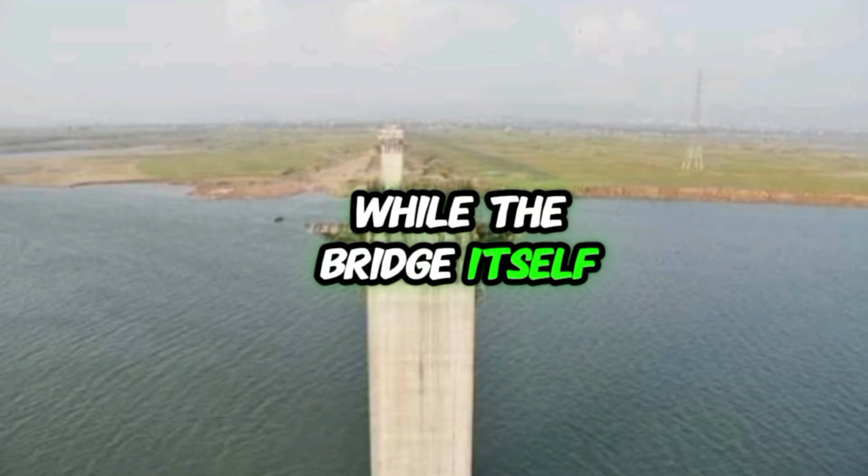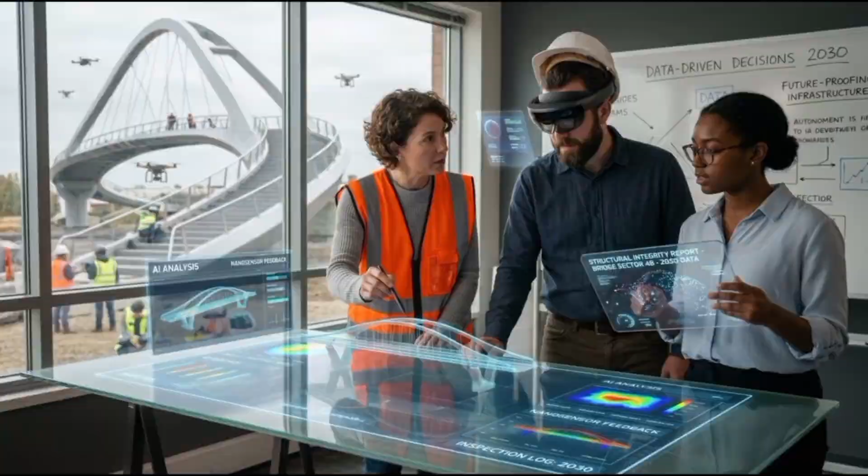The Golden Gate Bridge is one of the most photographed structures on Earth, a 2.7-kilometer line of steel that appears to float above San Francisco Bay. But imagine seeing another bridge that had already consumed years of work, with most of its structure standing, while the final connection remained missing and the construction site simply stopped.

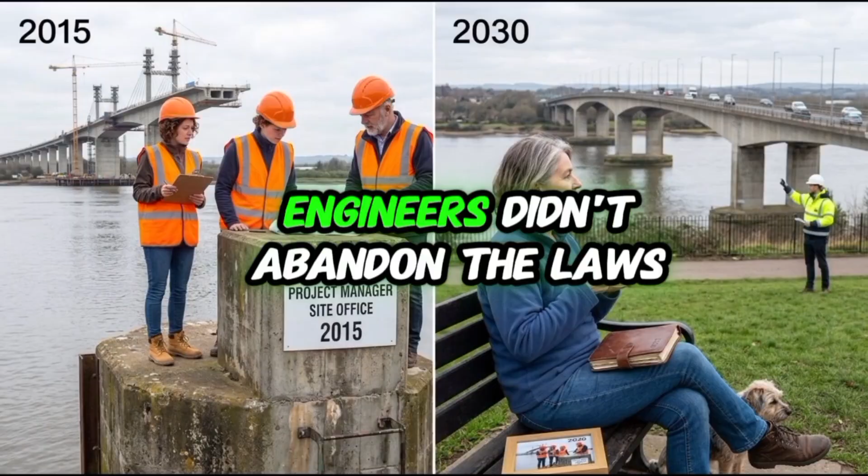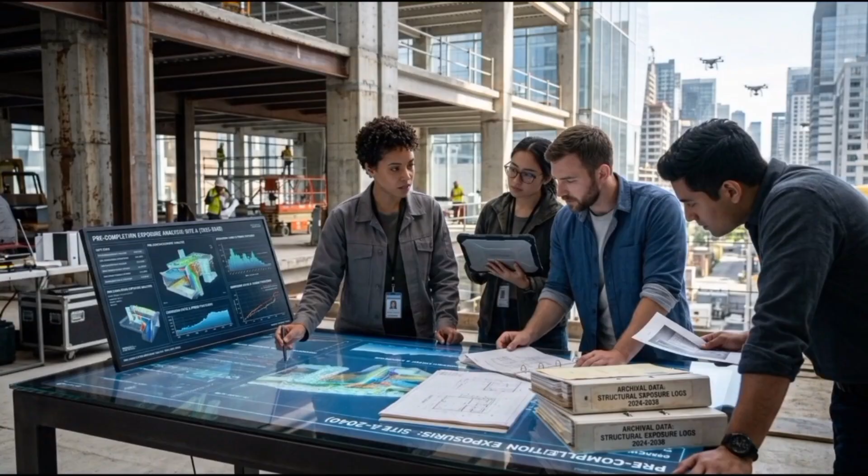Engineers didn't abandon the laws of physics. The project became trapped in contracts, funding, land access, and coordination problems. This is the Rathoa Haryam Bridge. And here's what nobody tells you about how a bridge can be almost finished, yet remain unfinished for years.

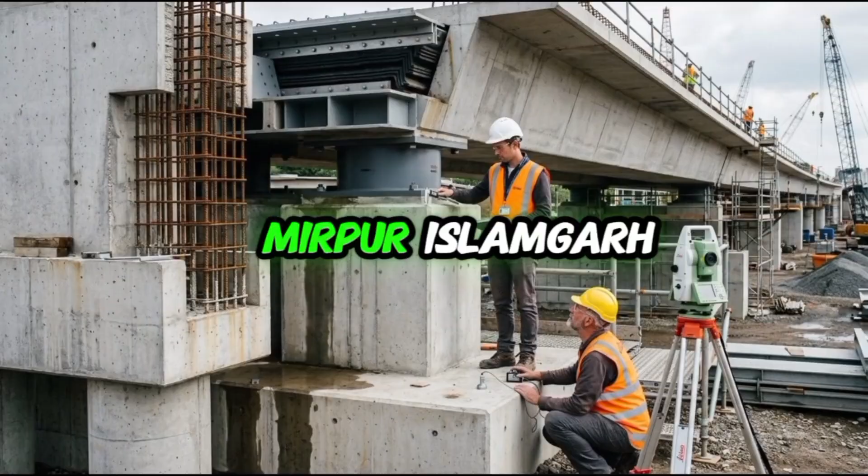The Rathoa Haryam Bridge was conceived as part of the infrastructure around Mangla Dam, with a straightforward public purpose: connect communities around the reservoir and dramatically reduce travel between Mirpur, Islamgarh, Chakswari, and surrounding areas. The project was initiated in 2011, and the approach roads were eventually completed, but the bridge itself became a different kind of engineering story. The client was the government, working through public sector infrastructure arrangements in Azad Jammu and Kashmir, while the project became tied to the wider Mangla Dam raising program.

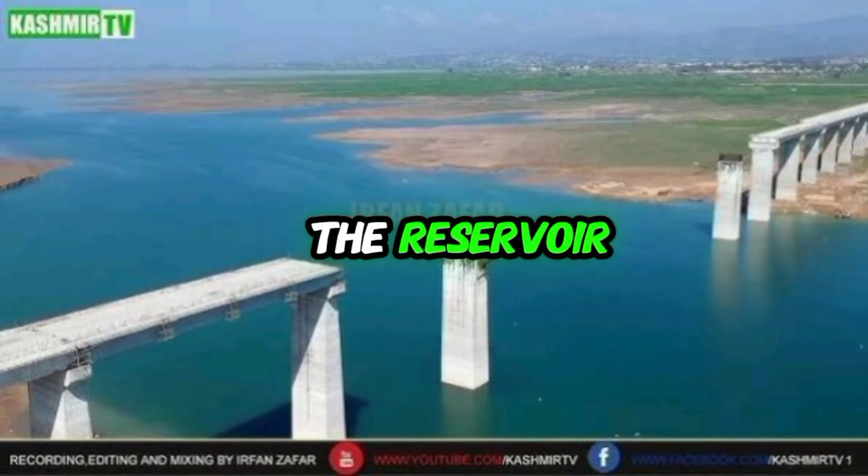The brief sounded simple enough: build a major crossing over the reservoir and connect the communities that had been separated by the expanded body of water. But the scale was not simple. The bridge is roughly 3 kilometers long. And according to officials, by the time construction stalled, about 80% of the work had already been completed.

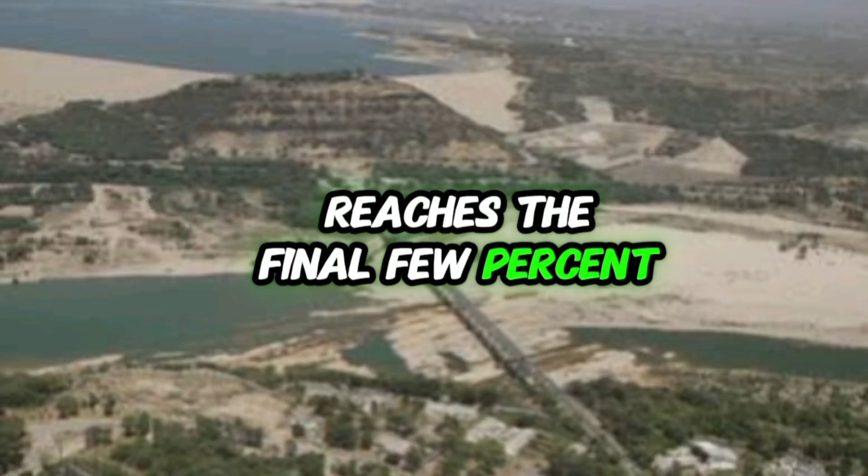Think about that for a moment. What happens when a mega project reaches the final few percent and discovers that the final few percent may be the hardest part? For residents, the benefit was obvious.

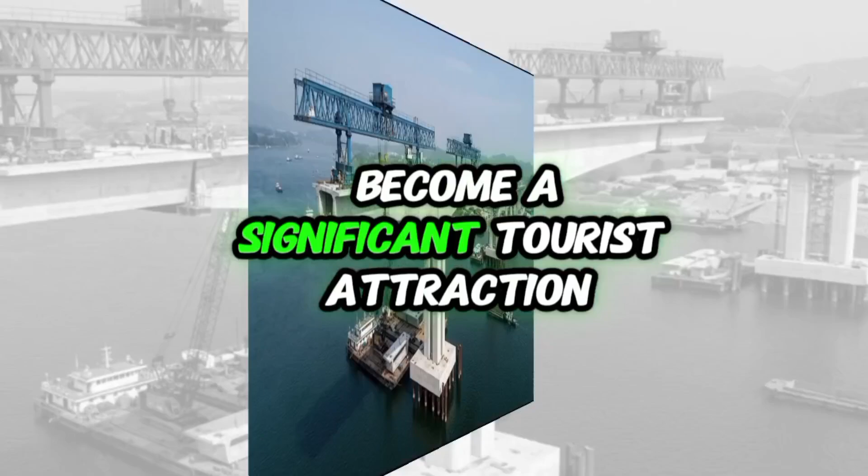A completed crossing could cut travel times between communities on opposite sides of the reservoir and provide a direct connection toward Mirpur and other major towns. Officials also described the finished bridge as having the potential to become a significant tourist attraction because of its location across the vast waters of Mangla.

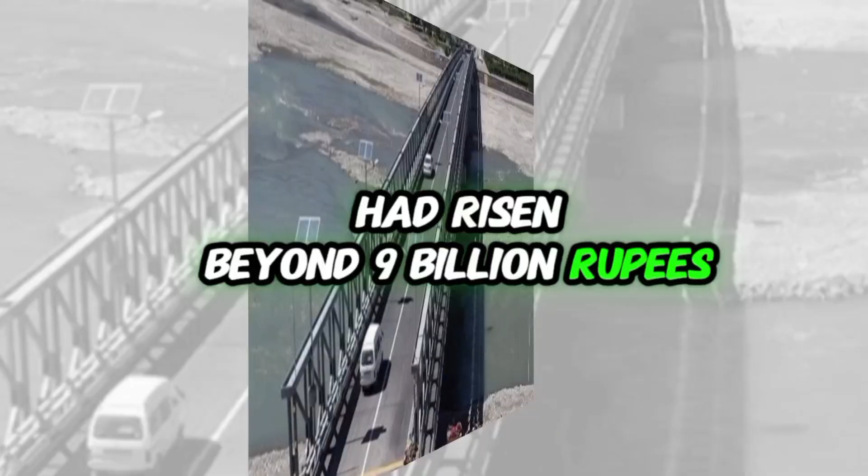The numbers tell another part of the story. The project was initially estimated at around 1.3 billion Pakistani rupees. Years later, the reported cost had risen beyond 9 billion rupees, with the government eventually approving another 5.5 billion rupees for completion. That is a remarkable escalation.

But that is not the remarkable part. The remarkable part is that around 80% of the bridge could be complete while the project remained functionally incomplete. And then the engineers started doing the math.

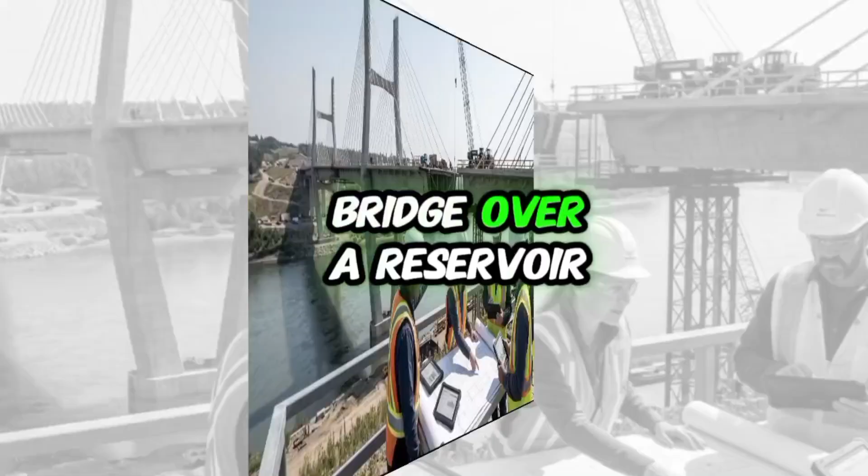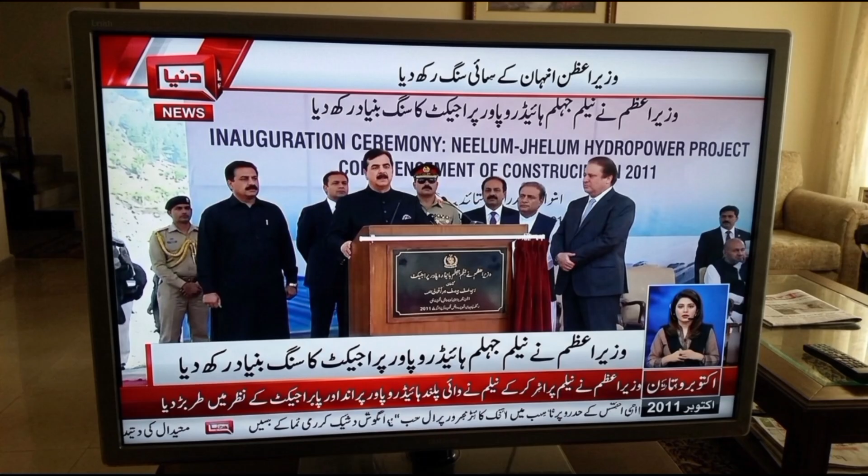Here's the thing about a bridge over a reservoir that every civil engineer knows: the water isn't just scenery, it is part of the engineering problem. A normal road bridge crosses a fixed landscape. Its foundations are designed around known ground conditions, predictable access, and a relatively stable relationship between the structure and the land. The moment you build across a reservoir created by a major dam, everything changes.

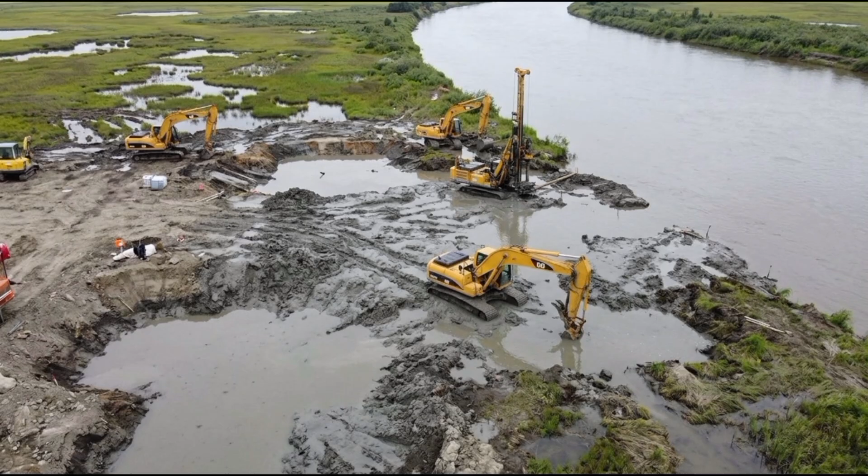Water levels rise and fall. Construction access changes. Foundations have to be placed in difficult ground. The structure has to deal with environmental exposure, fluctuating water conditions, and the enormous challenge of constructing a final span where the geometry of the entire bridge has to come together precisely.

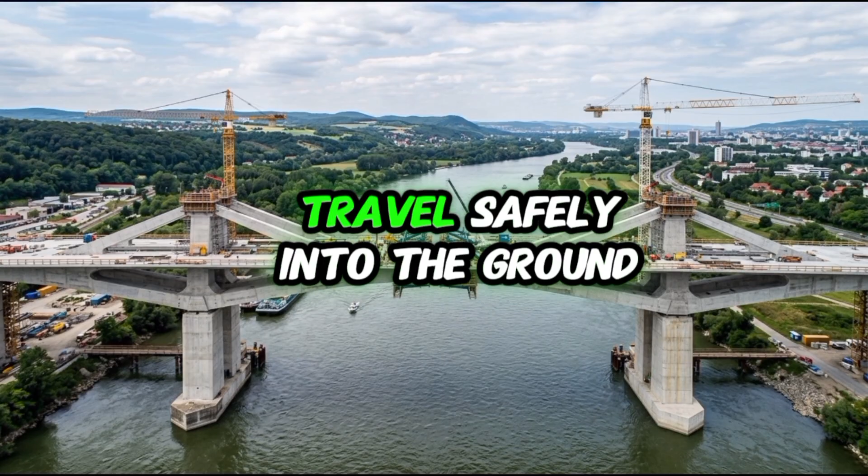Let's talk about what happens structurally when you leave a major bridge unfinished. A bridge isn't simply a collection of independent pieces. Loads move through the structure from the deck into beams, from beams into piers, and from piers into foundations. The technical term is load path, meaning the continuous route through which weight and forces travel safely into the ground. Break that path, and you don't have a complete bridge.

The Rathoa Haryam project became stuck around its central span, reported at approximately 160 meters. That meant the bridge could be largely built without actually performing its primary function. Not slightly, not as a design flourish—the connection was missing. This is where the project became technically unusual. The challenge wasn't simply pouring more concrete.

Officials later described work involving foundations in marshy ground and the use of German-made machinery to excavate and construct the remaining sections under changing water conditions. The final 125 meters were reportedly planned using a balanced bridge construction system designed to manage the conditions around the reservoir.

That approach matters. In balanced construction, engineers build outward from supporting piers in controlled stages, keeping the structure balanced as the span grows. It is a method used on major bridges precisely because placing conventional temporary supports in deep or difficult water can be expensive and technically complicated.

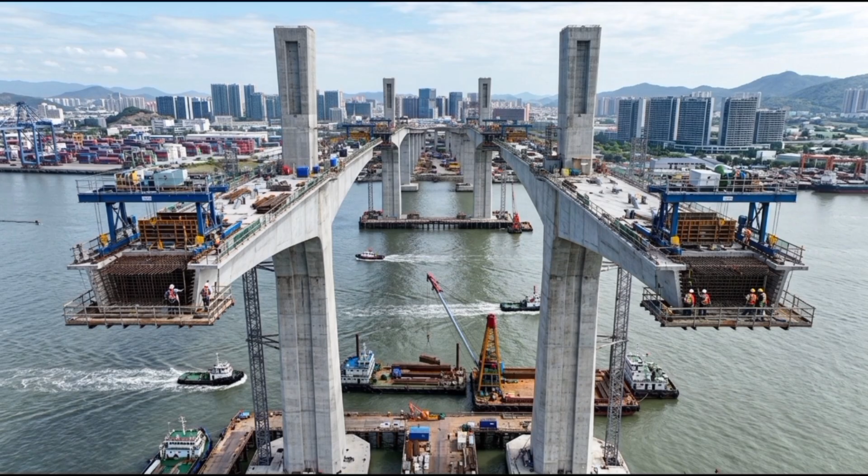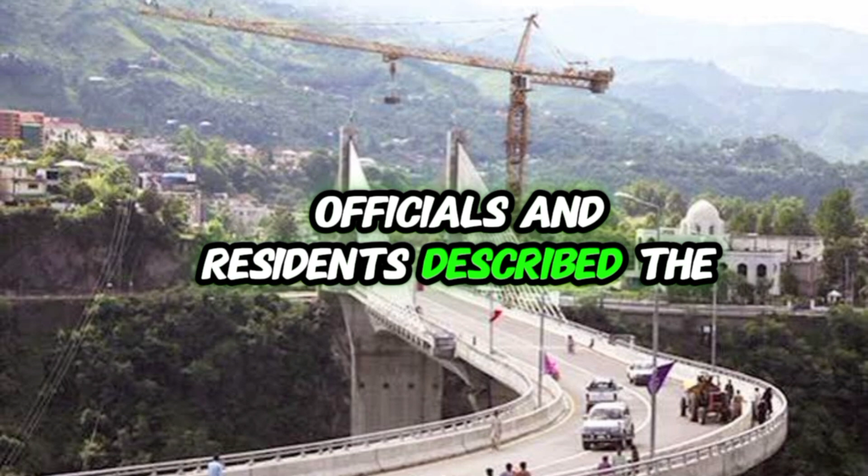The problem was that the bridge had already become a project with several moving parts: funding, legal issues, administrative decisions, technical constraints, and changing water levels. In 2024, officials and residents described the bridge as having been stalled because the 160-meter central span had not been constructed. The project had effectively reached the point where the missing section controlled the fate of everything that had already been built. But here's something about this building that nobody ever explains.

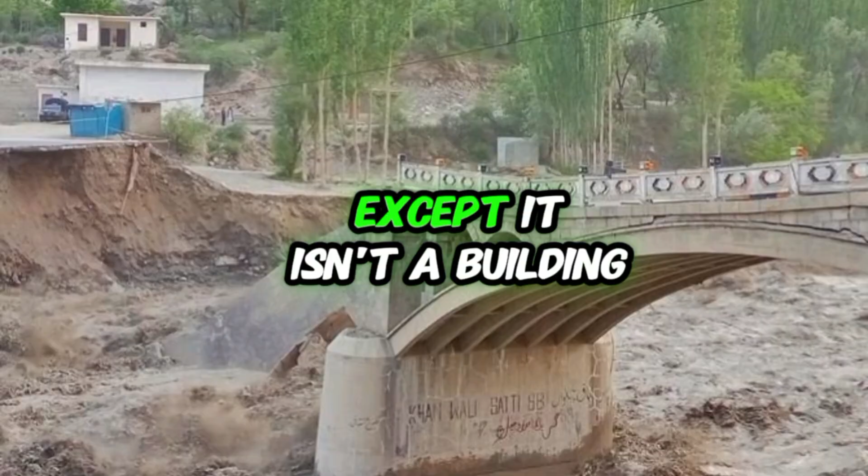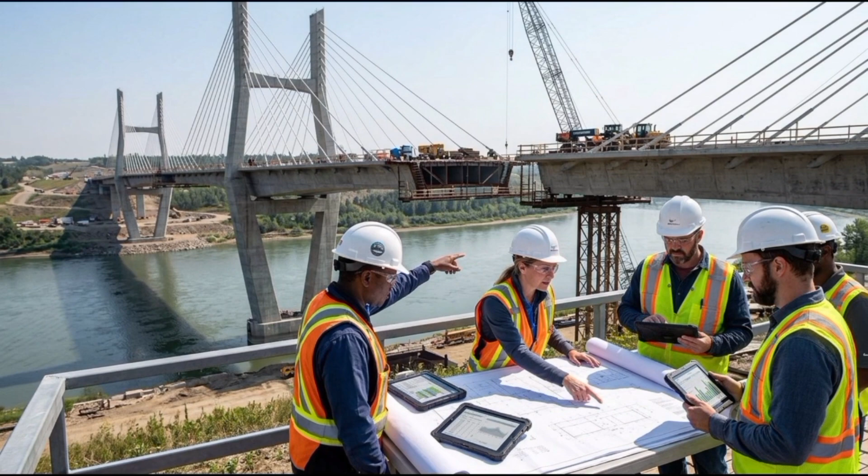Except it isn't a building. It's a bridge, and that distinction matters. The public sees concrete piers, steel, road surfaces, and a structure stretching across water. Engineers see a system that has to remain aligned to millimeters across enormous distances.

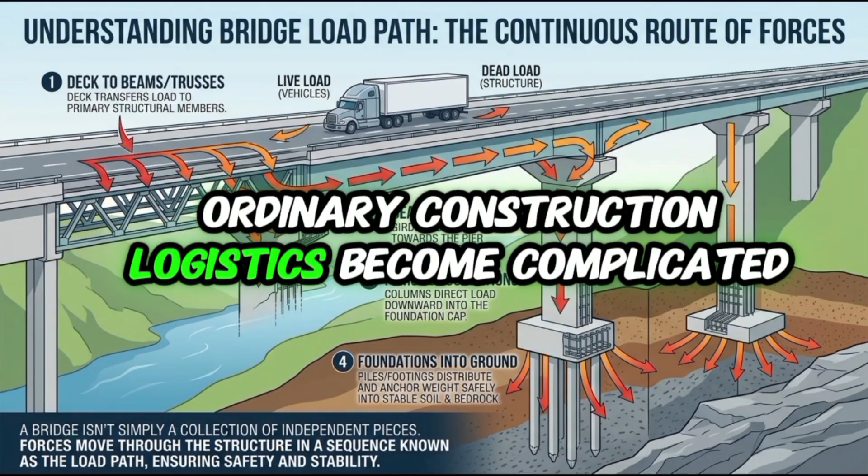One secondary complication is access. Construction equipment has to reach the work zone, and when the work zone is surrounded by reservoir water or marshy ground, ordinary construction logistics become complicated very quickly.

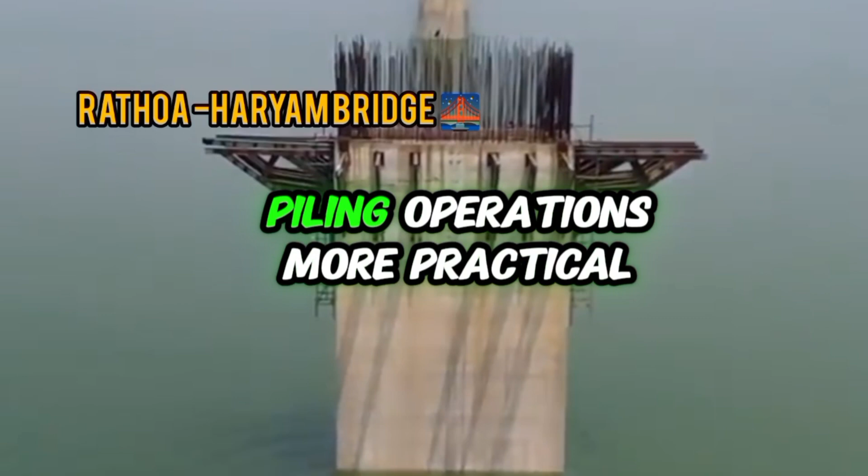Another is water level. The bridge's remaining work has been connected to periods when reservoir levels are low enough to make certain foundation and piling operations more practical. That means the construction schedule isn't controlled only by workers and machinery. The environment becomes part of the timetable.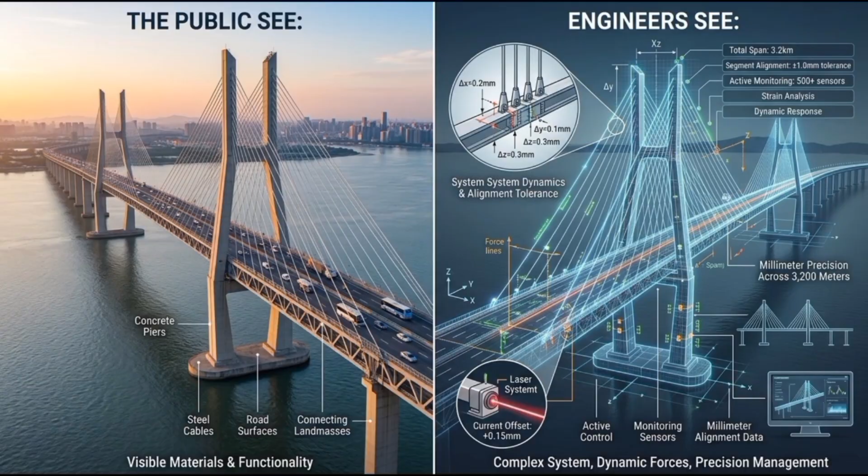And this part barely gets mentioned anywhere. The bridge also has to connect to roads that already exist. A completed span that doesn't properly integrate with its approaches is not a functioning transport link. The approaches, ramps, drainage, pavement, safety barriers, and road geometry all have to work together.

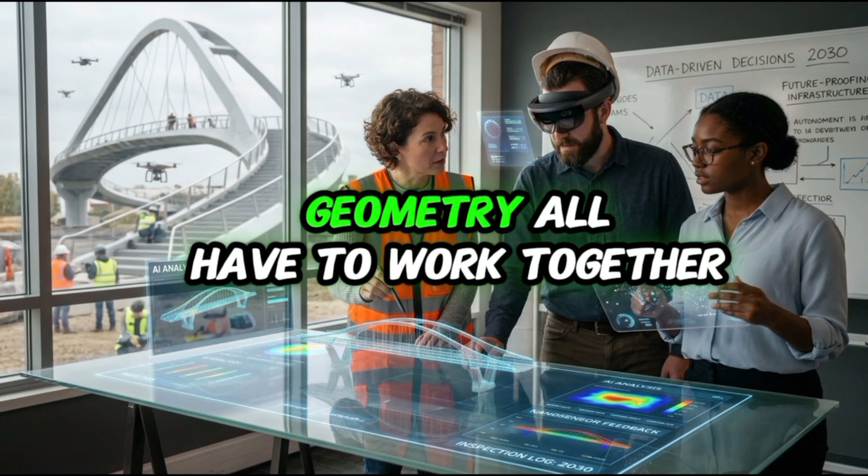Infrastructure is rarely defeated by one dramatic problem. More often, it gets trapped by dozens of ordinary ones. That part doesn't make it into the architecture magazines.

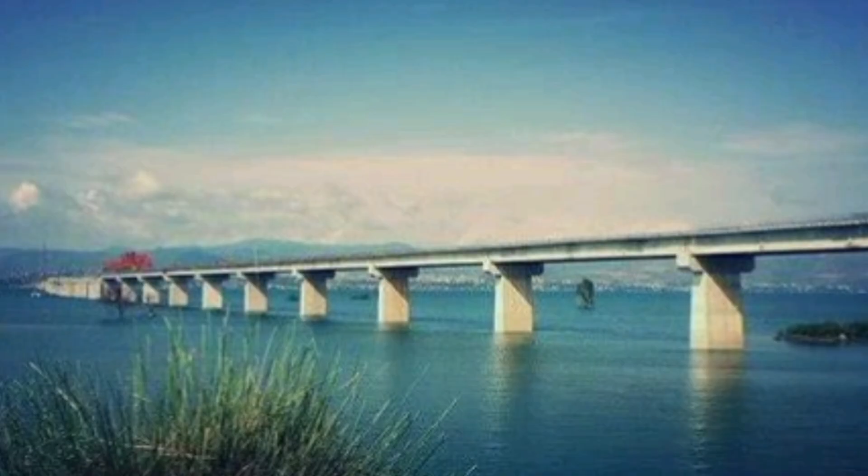And then there is the most human complication of all. People waited. By 2020, public discussion around the project described it as having been under construction for years, with the work reportedly stopped around 2016. Residents saw the structure sitting across the landscape while the promised connection remained absent.

No dramatic collapse. No spectacular engineering failure. Just time. Within 1 year, the bridge was still incomplete. Within 4 years, the same unfinished connection had become part of the project's identity. The structure wasn't failing in some cinematic way.

The problem was that it wasn't doing what it had been built to do. Nobody was hurt in a bridge collapse because there wasn't one. The incident was the absence of an ending. And that may be harder to explain.

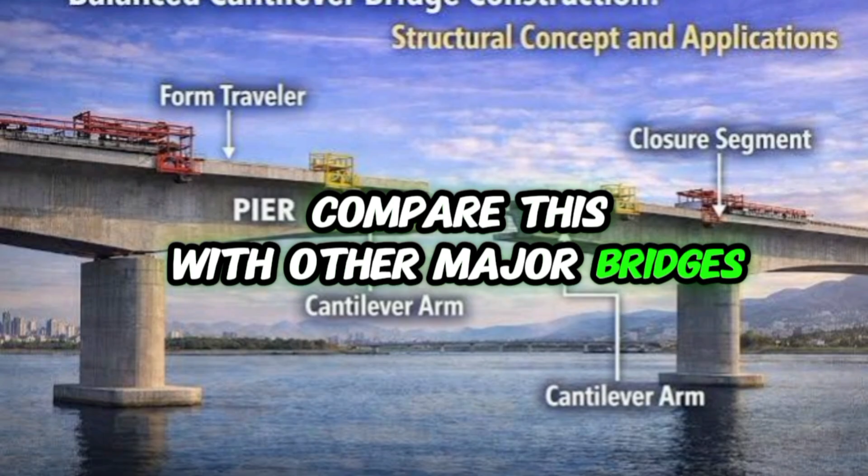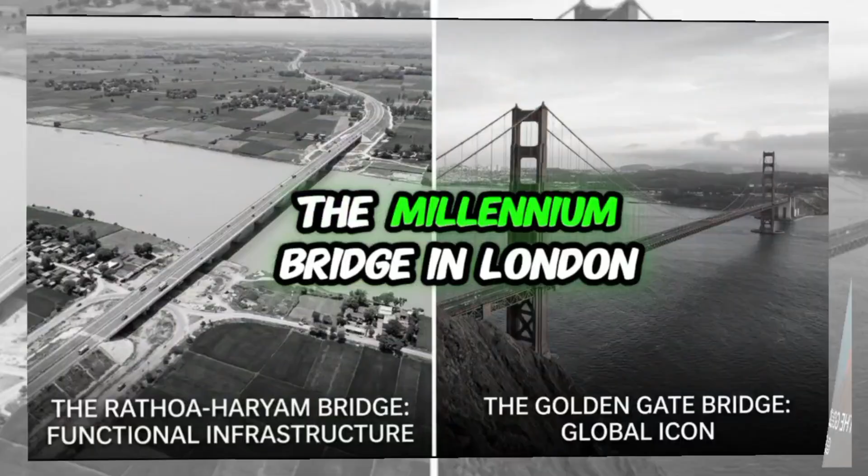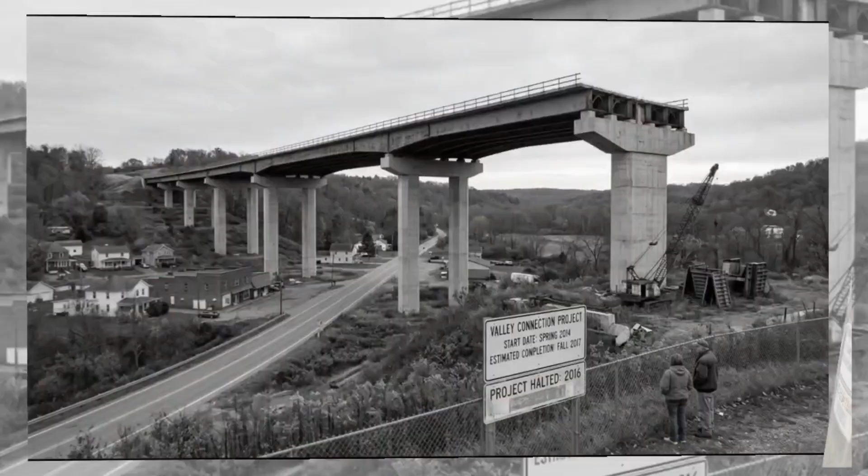Compare this with other major bridges. The Tacoma Narrows Bridge famously failed through aerodynamic instability in 1940, teaching engineers how wind-induced oscillation can destroy a structure. The Millennium Bridge in London survived its opening day, but unexpected lateral movement caused engineers to close it temporarily and retrofit dampers. The Akashi Kaikyo Bridge in Japan survived the 1995 Kobe earthquake and remains one of the world's longest suspension bridges. Different problems. Different outcomes.

Here is the fundamental difference between the Rathoa-Haryam Bridge and every other major bridge we've covered. Its defining problem wasn't that the completed structure failed. It was that the project never reached completion in the first place.

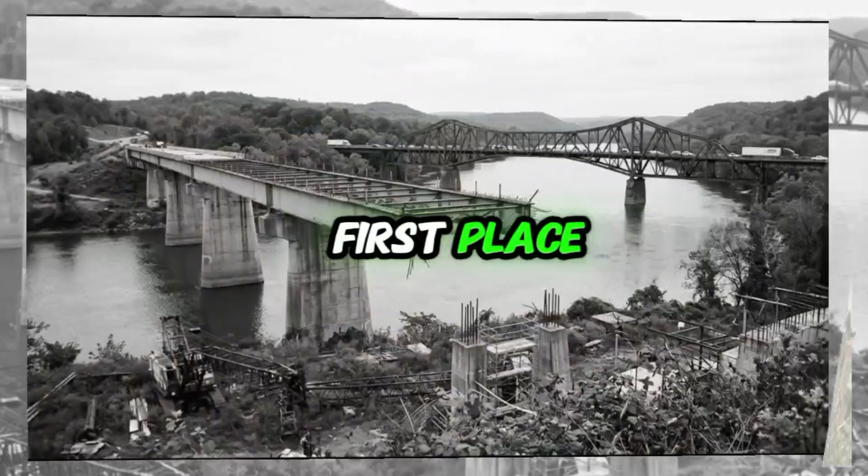And now comes the uncomfortable part. A bridge that sits unfinished for years creates a very different engineering question from a bridge that has been operating for decades. Materials age. Concrete undergoes creep, meaning it slowly deforms under sustained load.

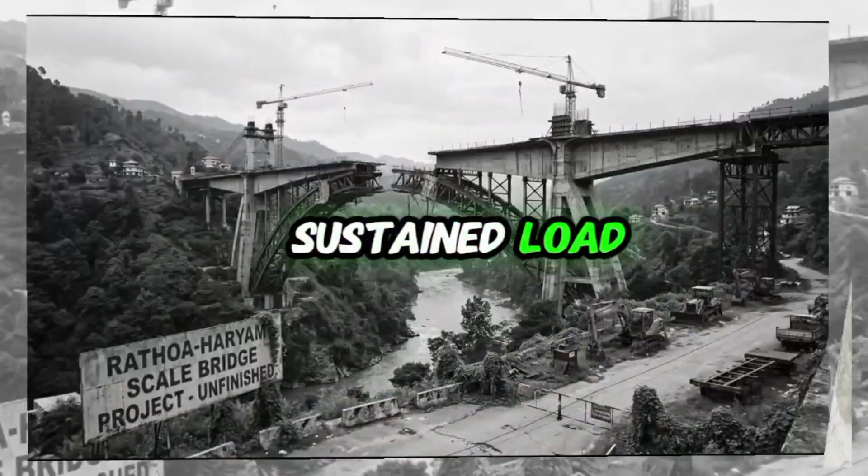Steel can corrode when protective systems deteriorate. Bearings can wear. Expansion joints can fail. Water can enter tiny cracks and reach reinforcement.

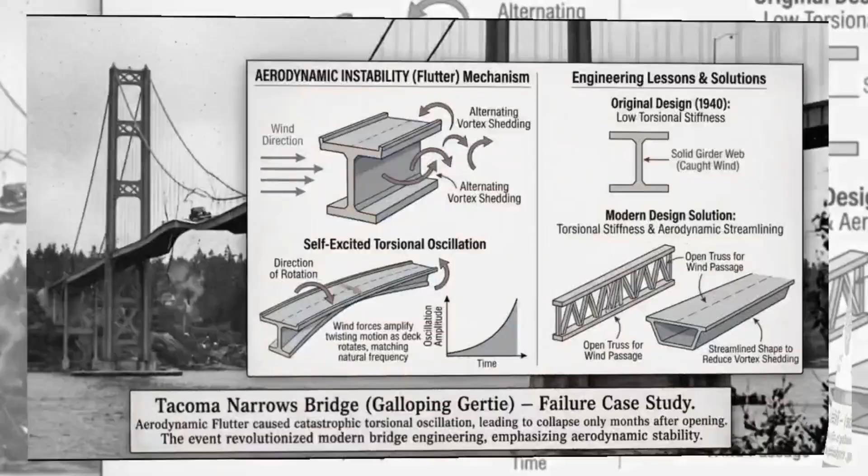But here's the question that sits beneath all of this. What happens when a major structure spends years in an incomplete state before the final system is connected? The honest answer is that every component still has to be assessed according to its actual condition. There is no single number that says an unfinished bridge becomes unsafe after 4 years. There is no universal countdown clock.

The engineers have to inspect the concrete, reinforcement, foundations, bearings, joints, exposed steel, and alignment before deciding how the remaining work should proceed. And that is where the absence of data argument becomes important. There is no historical data for what a Rathoa-Haryam scale bridge looks like after 4 years.

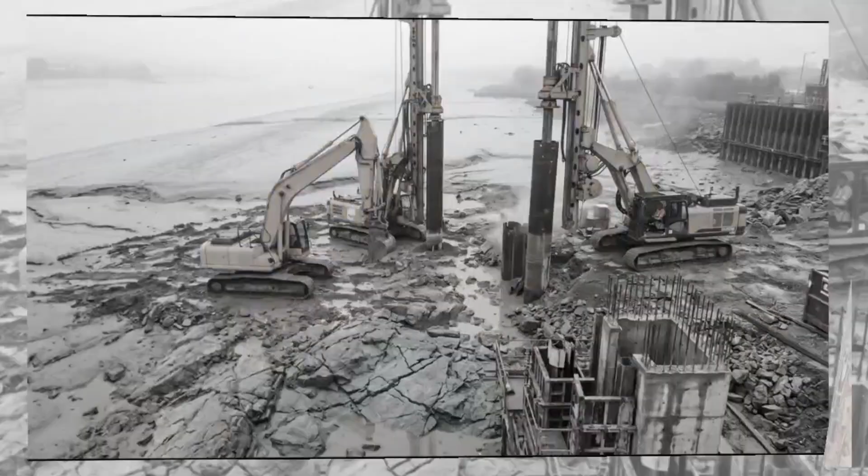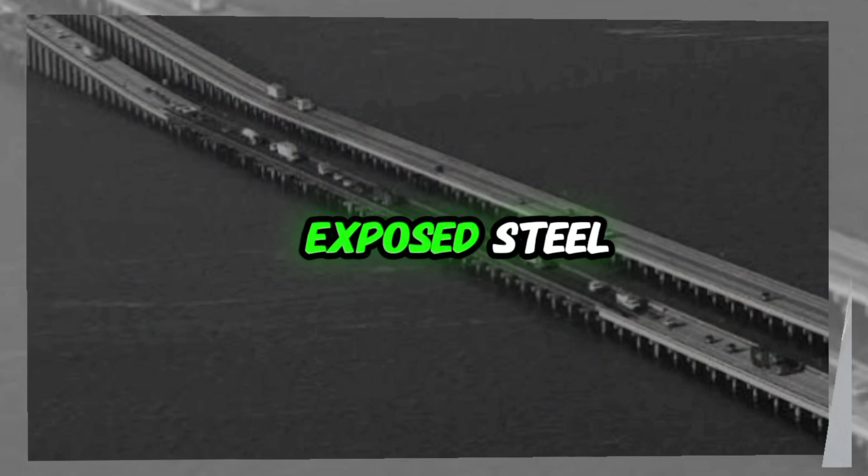There is no universal countdown clock. The engineers have to inspect the concrete, reinforcement, foundations, bearings, joints, exposed steel, and alignment before deciding how the remaining work should proceed. And that is where the absence of data argument becomes important.

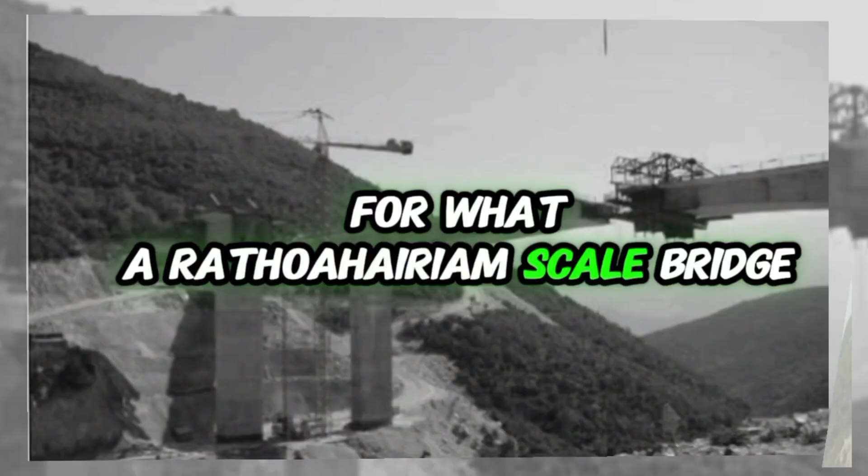There is no historical data for what a Rathoa-Haryam scale bridge looks like after spending many years incomplete, because no identical project has followed exactly the same construction history. This is the first. It is the only one.

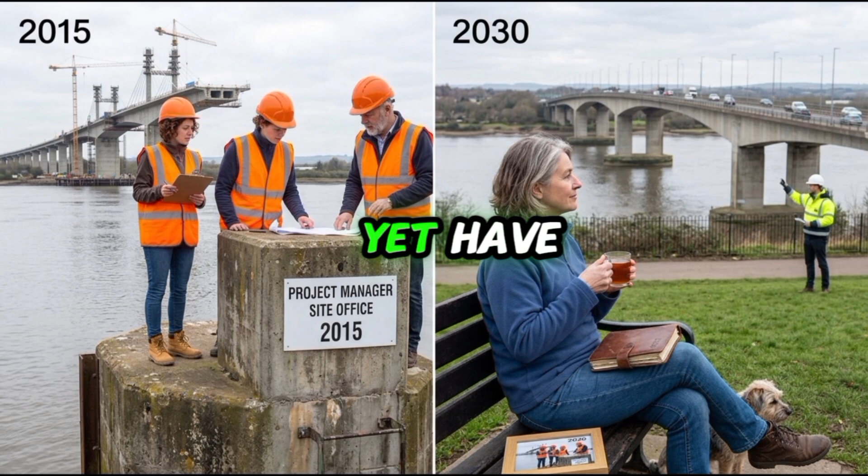By 2030, engineers will be looking at inspection records that today's project teams cannot yet have. By 2040, another generation of engineers may be reading those records to understand how long-term exposure affected the structure before completion. And honestly, that's a little unsettling.

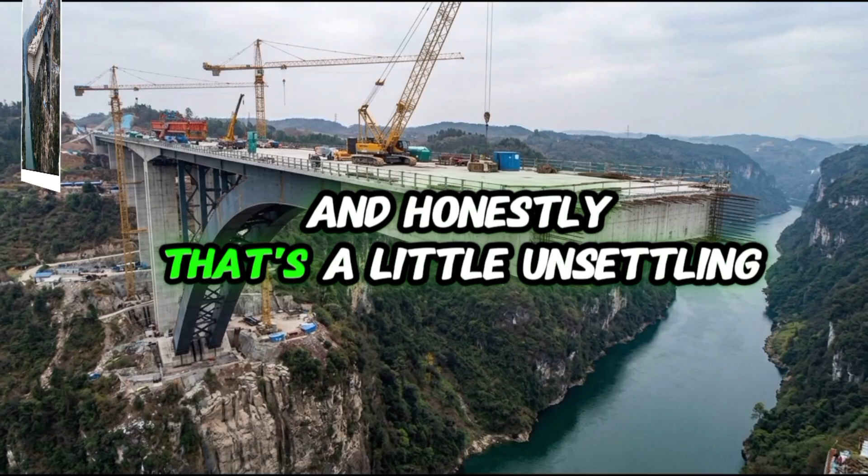Not because the bridge is destined to fail. There is no evidence for that. The unsettling part is simply that infrastructure can outlive the people who made the decisions that shaped it.

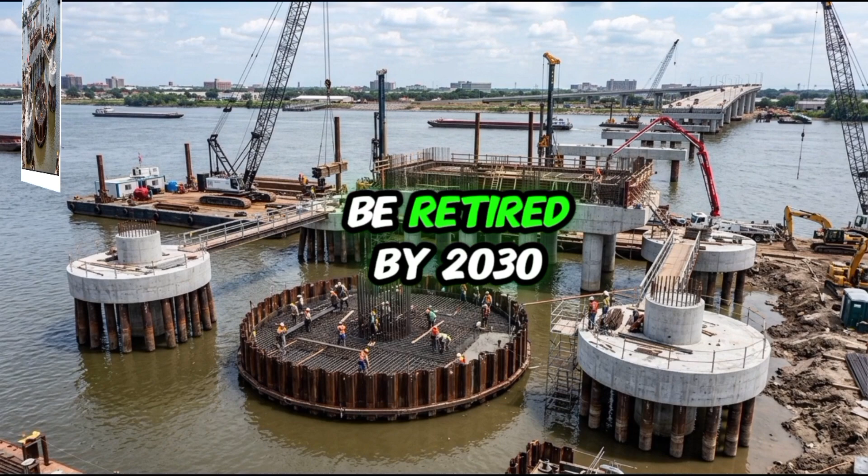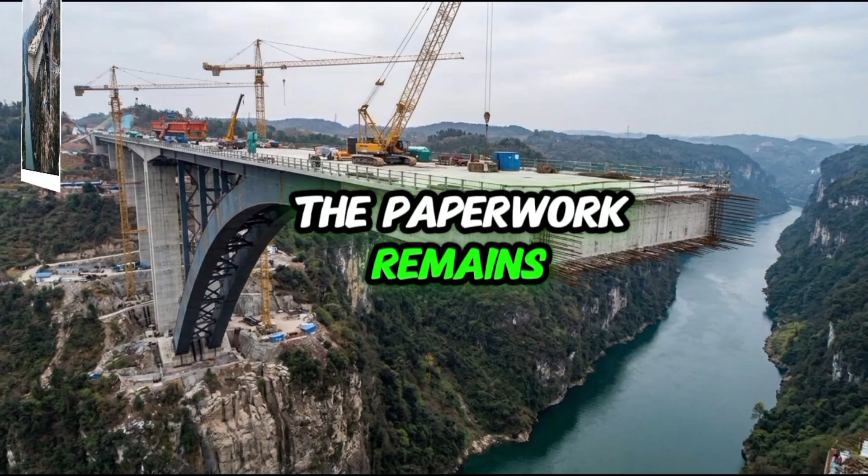A project manager who saw the bridge in 2015 may be retired by 2030. An engineer who inspected one of its piers may no longer be involved when the next major assessment happens. The structure remains. The paperwork remains. The data remains. Hopefully. But here's the detail nobody surfaces.

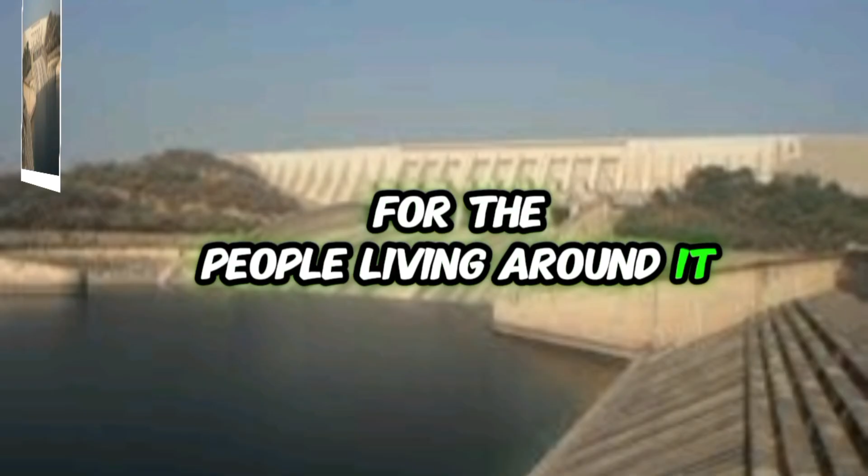The bridge was never just a construction project for the people living around it. For them, it was supposed to change ordinary life. A shorter journey. A faster trip to work. A simpler route to school. A connection to another town.

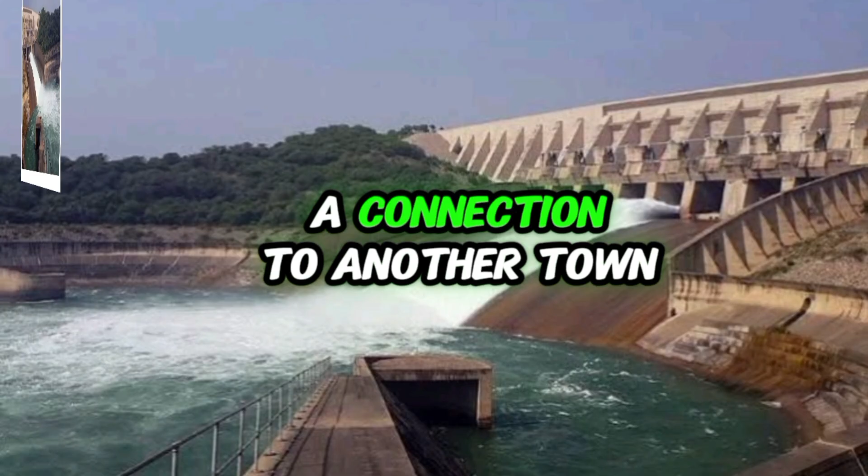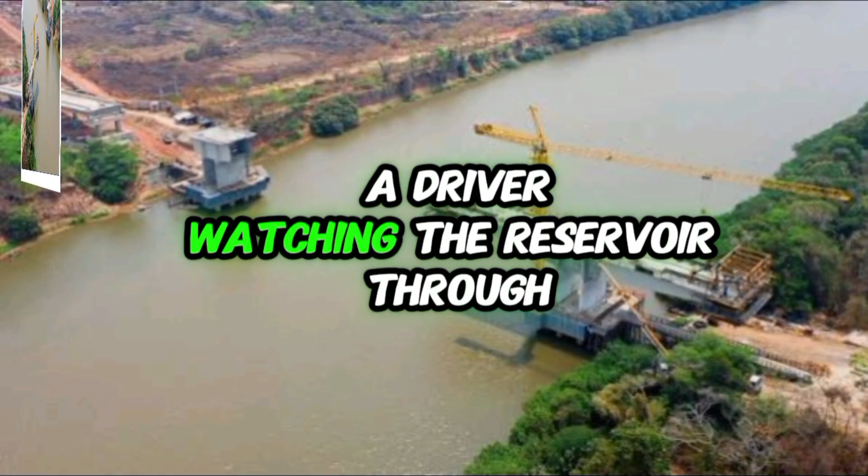You can picture the small details that make infrastructure meaningful: a motorbike carrying 2 people along a dusty road, the smell of hot asphalt in summer, a driver watching the reservoir through a windscreen while taking a route that exists only because another route never opened.

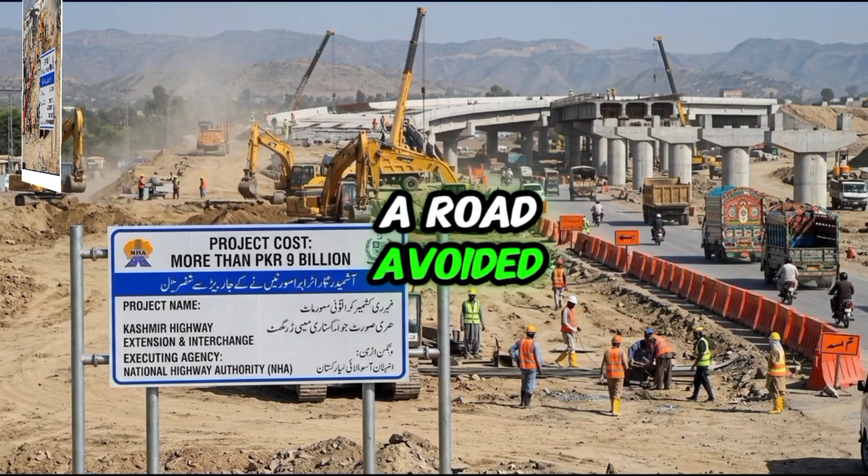People don't experience a bridge as a structural diagram. They experience it in minutes. 20 minutes saved. An hour lost. A road avoided. A journey made possible. None of them are thinking about the load path. They're thinking about getting home.

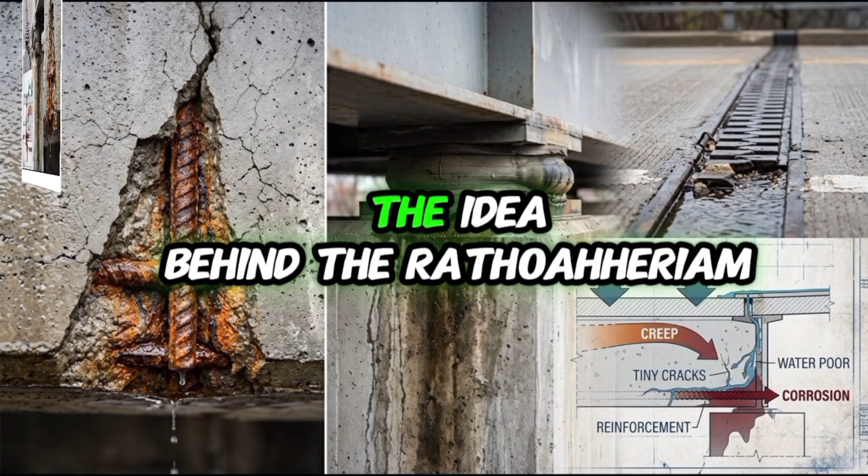And right now, somewhere around Mangla Reservoir, the idea behind the Rathoa-Haryam Bridge still exists in concrete, steel, unfinished connections, and a public expectation that began more than a decade ago.

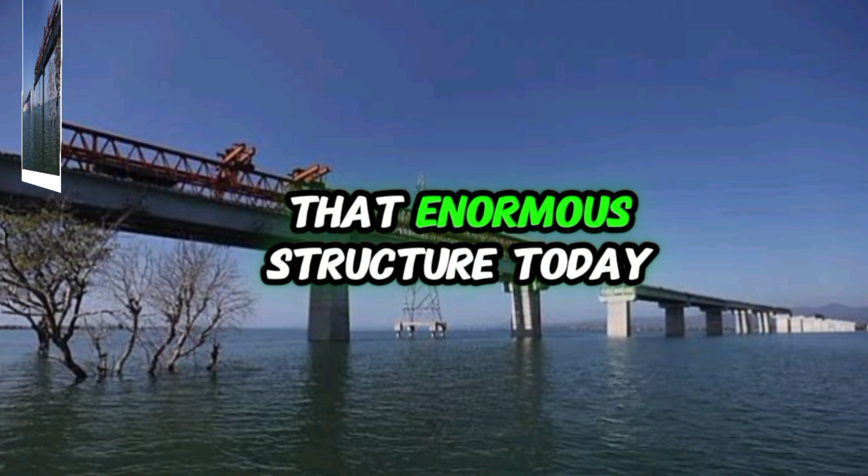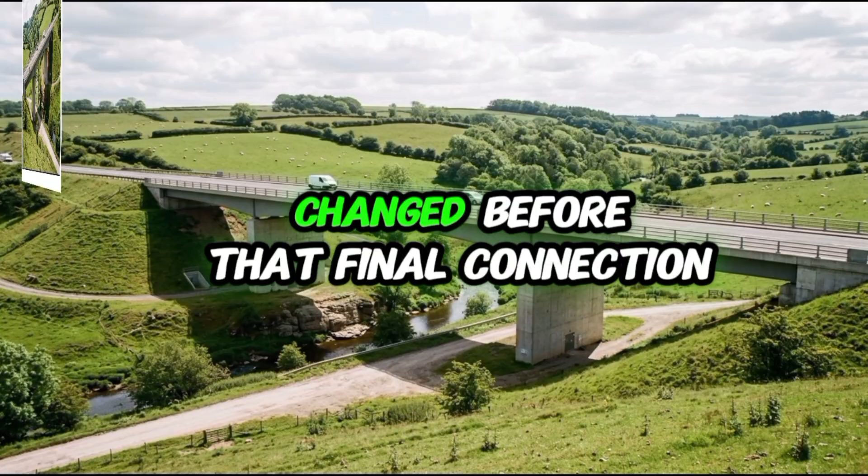A person can stand near that enormous structure today and see what was achieved, and what wasn't. The question is no longer whether engineers know how to build the final span. The question is what years of delay have changed before that final connection is made.

Drop it below. Would you trust a bridge that spent years unfinished before opening to traffic?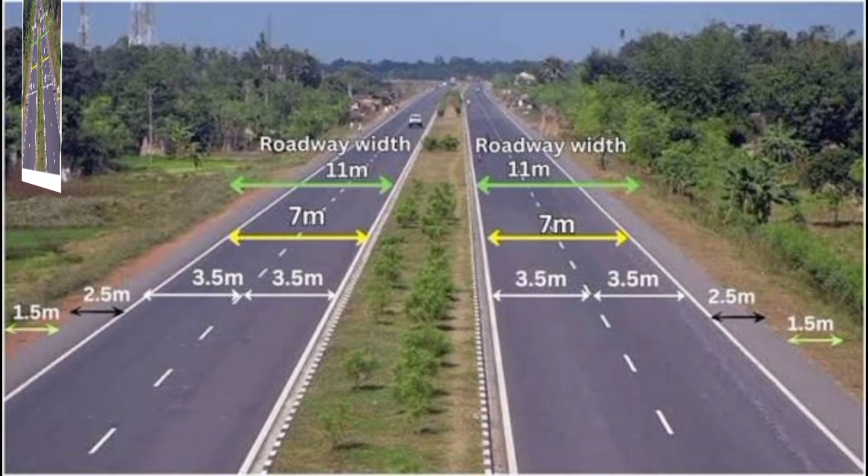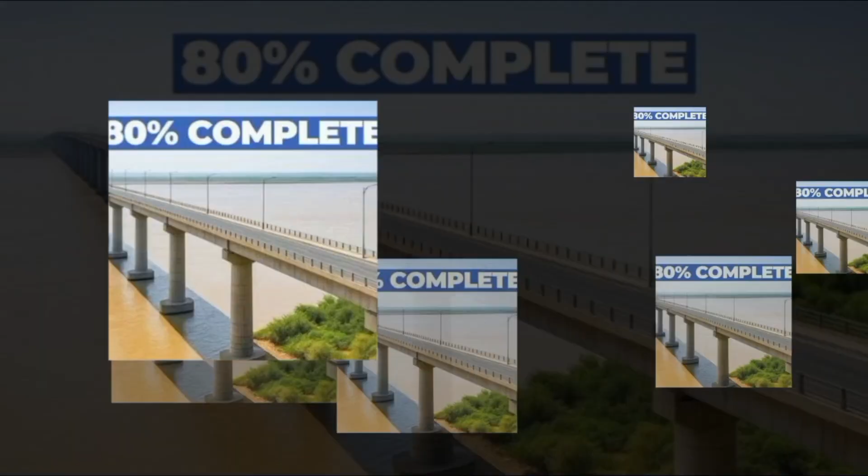Verify: Rathoa-Haryam Bridge project in Azad Jammu and Kashmir, Pakistan. Mangla Dam, reservoir and dam associated with the project. Project initiated in 2011, reported by Pakistani news coverage.

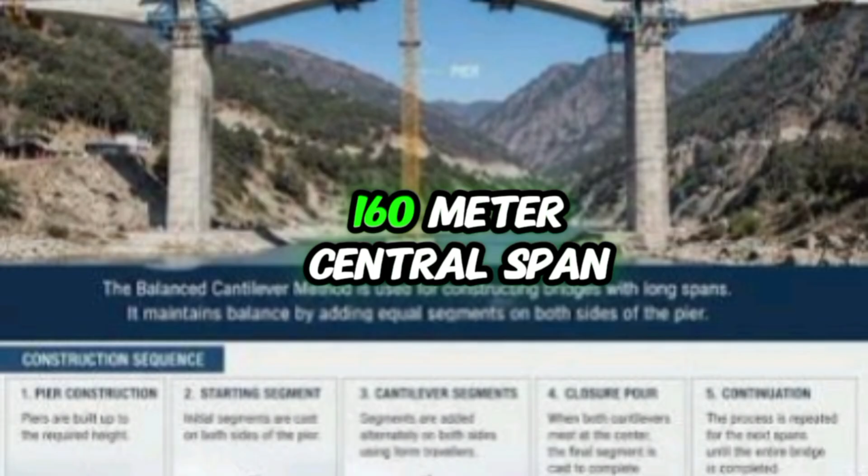Approximately 3 kilometers, reported length of the Rathoa-Haryam Bridge. Approximately 80% completed before the central span, reported by officials and residents. 160-meter central span, reported as the missing section that stalled completion. Approximately 4 kilometers of approach roads, reported as completed.

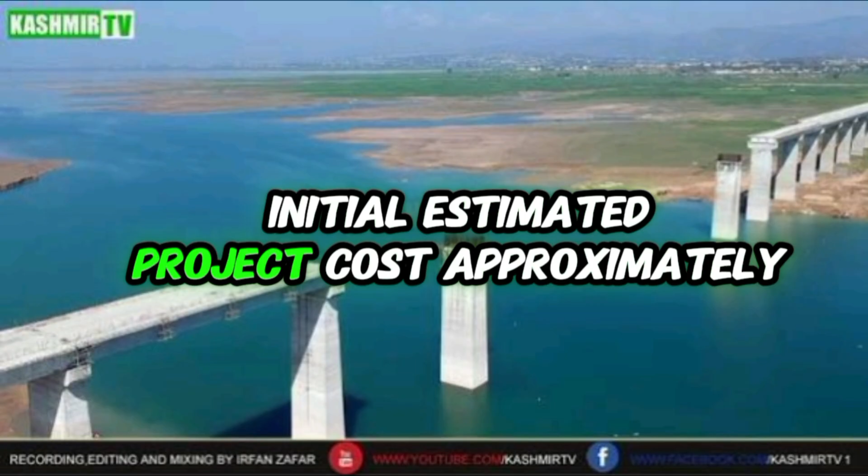Initial estimated project cost, approximately PKR 1.3 billion. Reported later project cost, more than PKR 9 billion. Additional approved funding, approximately PKR 5.5 billion.

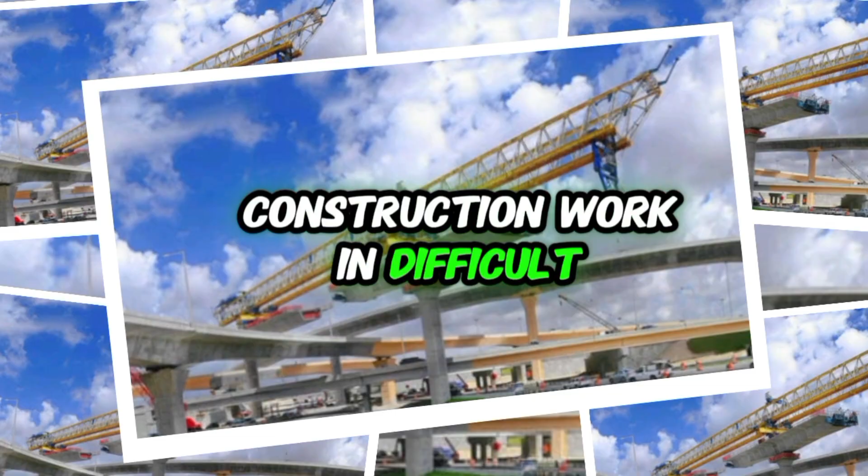German-made machinery, reported for construction work in difficult, marshy ground. Final remaining construction section, approximately 125 meters, reported in connection with the planned balanced bridge construction system.

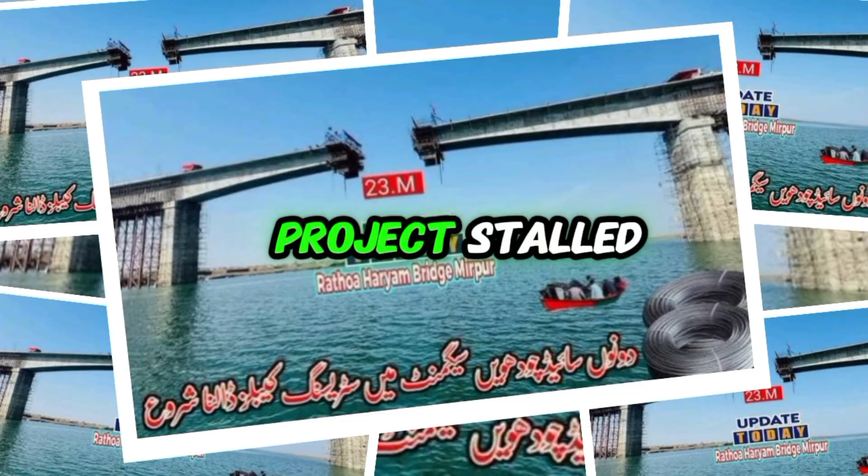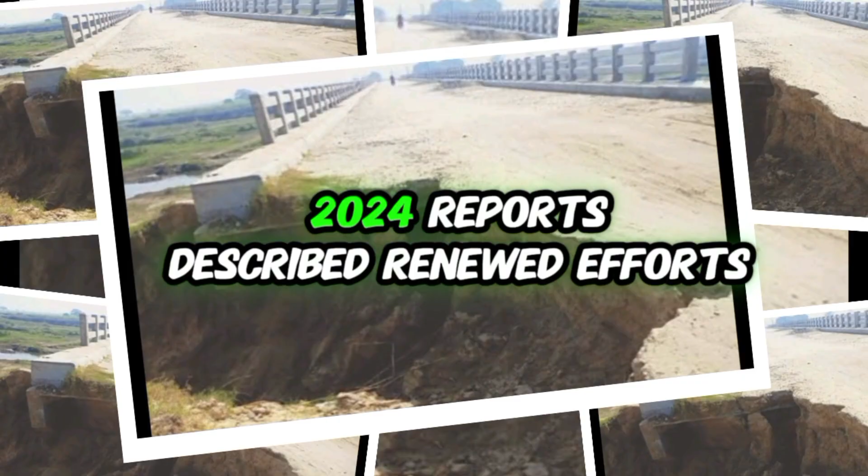Project stalled around 2016, reported in public discussion and later news coverage. 2011, project initiation date reported in Pakistani media. 2020, public discussion documented the bridge as having remained stalled for several years. 2024, reports described renewed efforts and the removal of legal, technical, administrative, and financial obstacles.

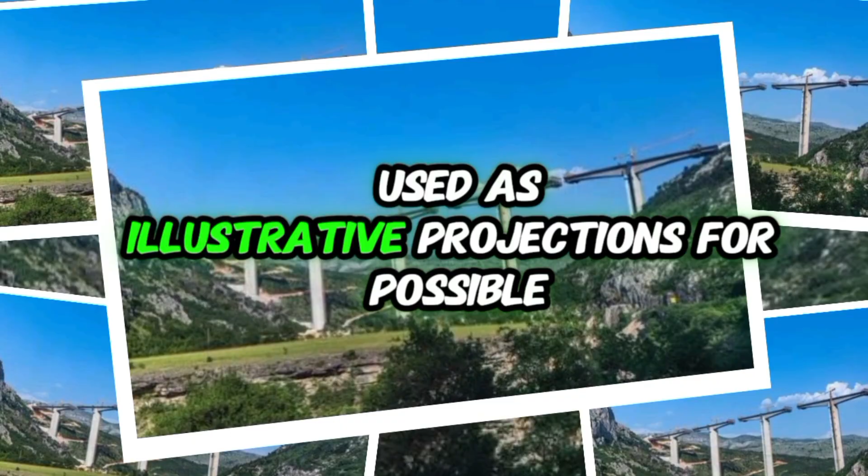2030 and 2040, future years used as illustrative projections for possible engineering inspection records, not documented project deadlines.

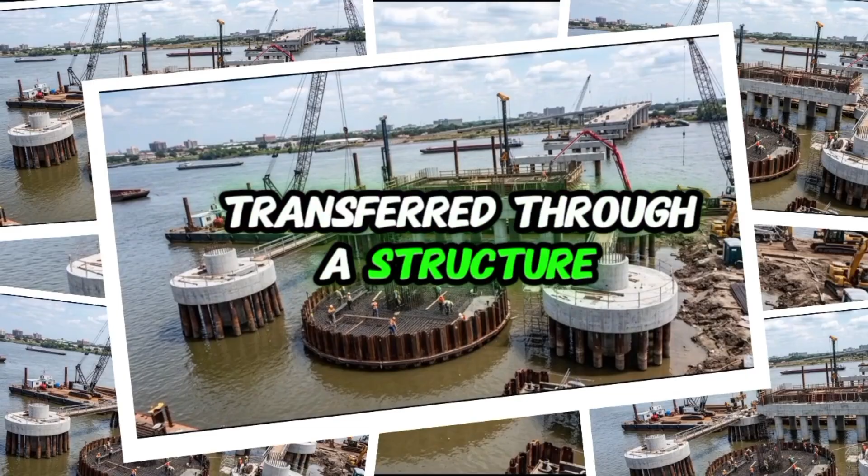Load path: engineering term describing the route through which structural loads are transferred through a structure to its foundations. Creep: gradual deformation of concrete under sustained load. Tacoma Narrows Bridge: suspension bridge that collapsed in 1940 due to wind-induced aerodynamic instability.

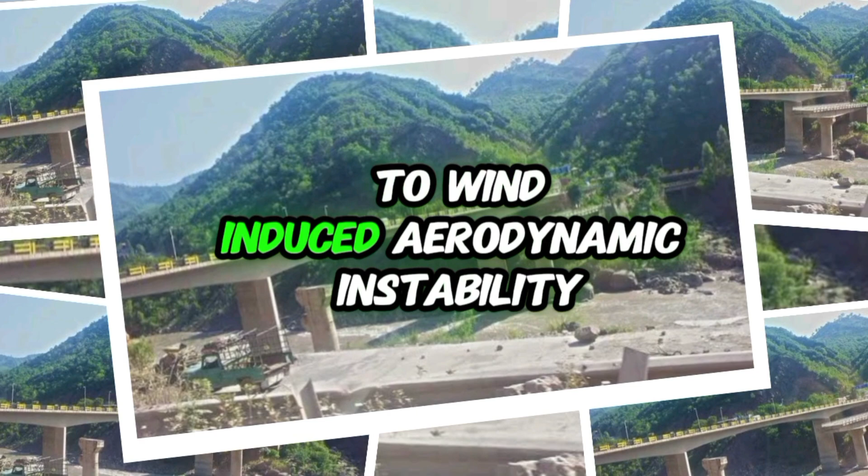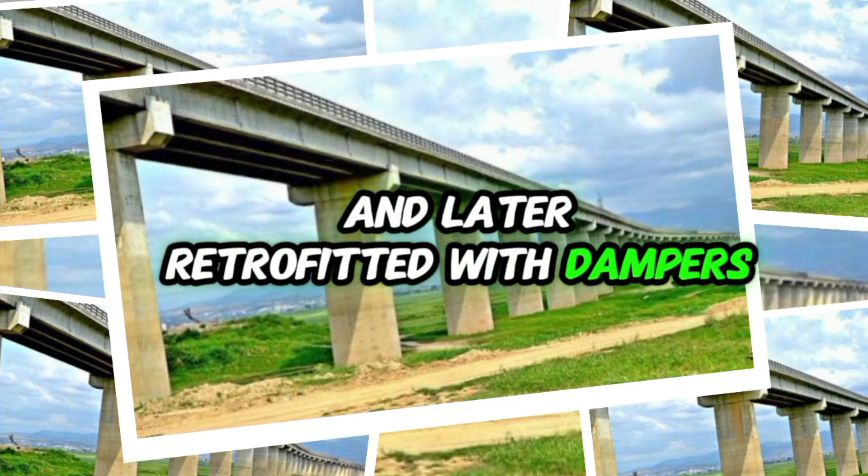Millennium Bridge, London: pedestrian bridge temporarily closed after unexpected lateral movement following its 2000 opening and later retrofitted with dampers. Akashi Kaikyo Bridge, Japan: major suspension bridge that survived the 1995 Kobe earthquake and remains a record-setting long-span bridge.

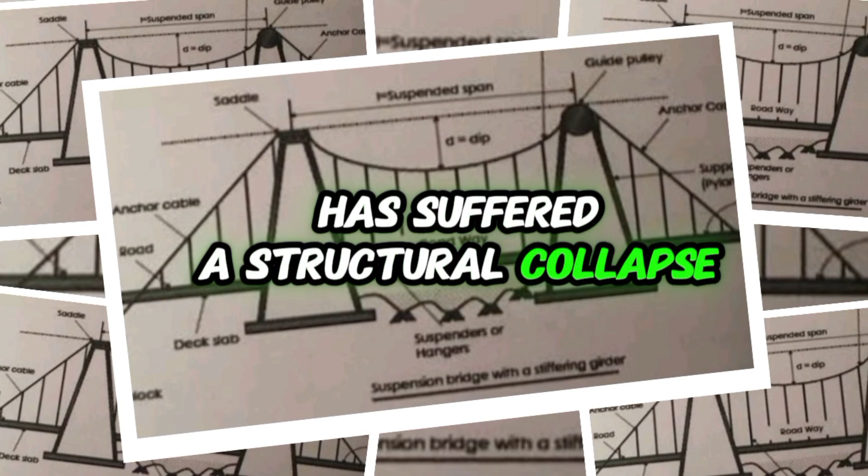No evidence was found in the cited sources indicating that the Rathoa-Haryam Bridge itself has suffered a structural collapse. No claim is made that the bridge is unsafe or likely to collapse. No deaths or injuries are attributed to a structural failure of the Rathoa-Haryam Bridge.